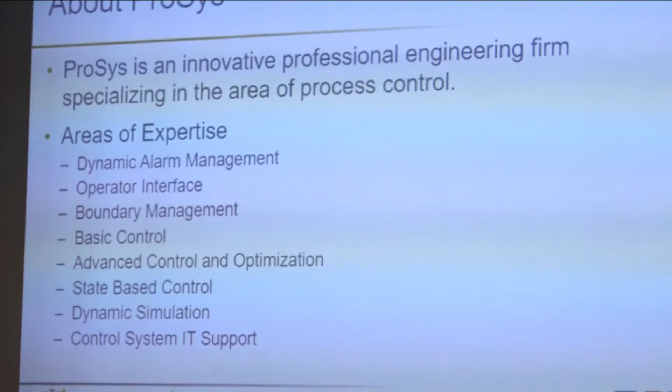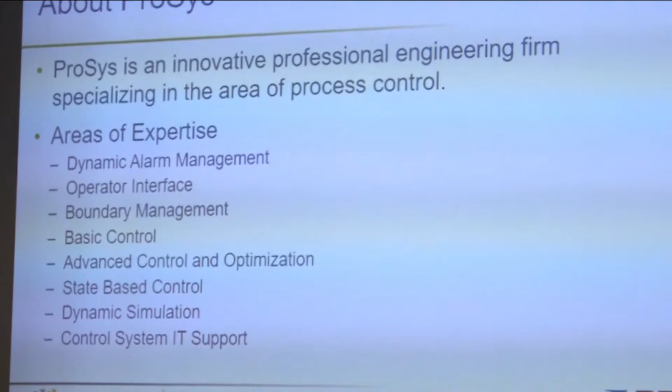Basic control, advanced control and optimization, a lot of MPC implementations we do as well. State-based control is another growing area, more popularly known as procedural automation, dynamic simulation, and control system IT support. A lot of people put these in a bucket and call that advanced apps - basically, anything that sits on top of the control system that leverages it is largely what we're doing.

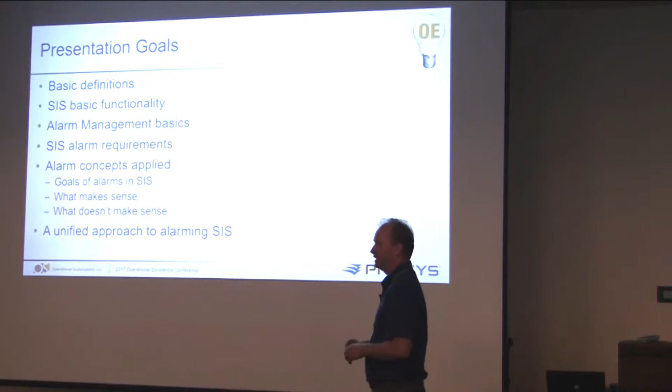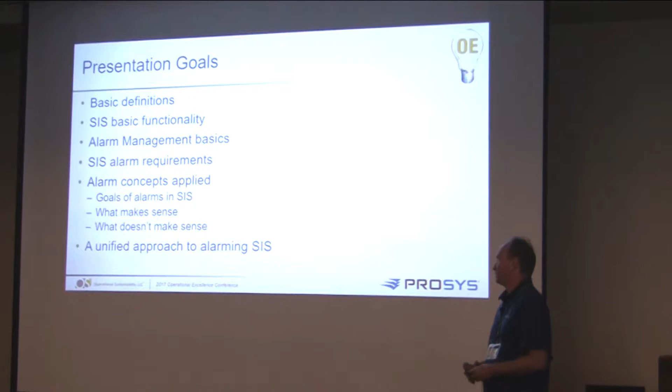So some of the presentation goals: as a good engineer, I have to define the terms I'm going to use, right, because we don't like to miscommunicate - we're all into the details about that. We'll talk a little bit about the basic functionality and why that causes alarms with the SIS, some of the alarm management basics, and then we'll take you into some real practical details, some requirements, some different things that we recommend you should do with your SIS system as it relates to alarming.

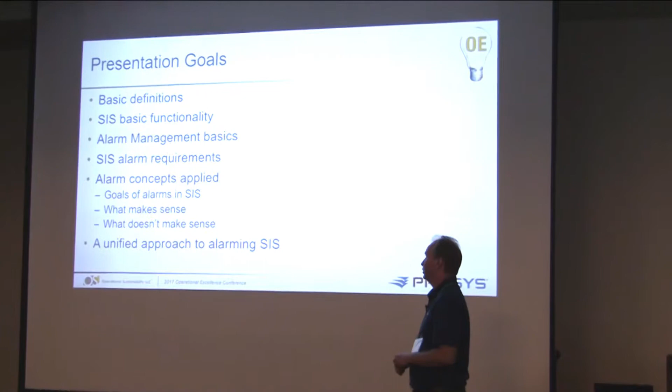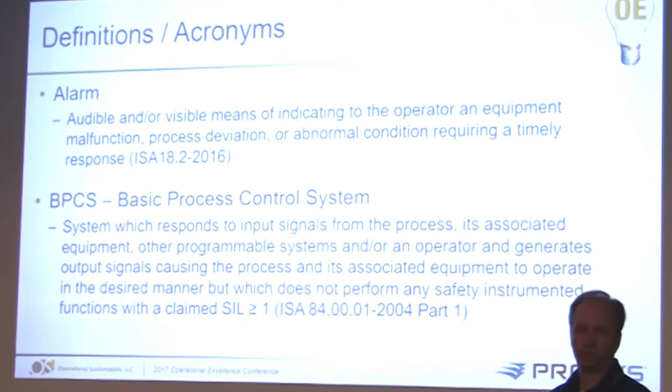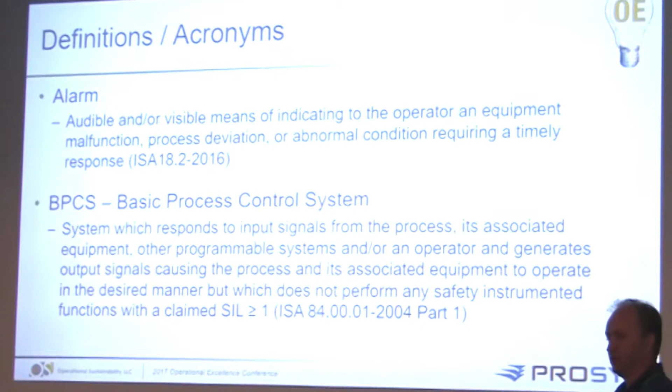So right on to the definitions. An alarm - there's a definition in ISA 18.2 about this - it's an audible or visible means of indicating an operator of equipment malfunction, process deviation, or abnormal condition, right? So it's something that indicates something bad is going to happen. We're trying to notify the operator, hey, this thing is going to happen, here's the alarm, you can react to it and potentially limit or prevent the consequence from occurring. So alarms, one thing to keep in mind, are all about consequences. No consequence, no alarm. Consequence, alarm - that's one of the important things.

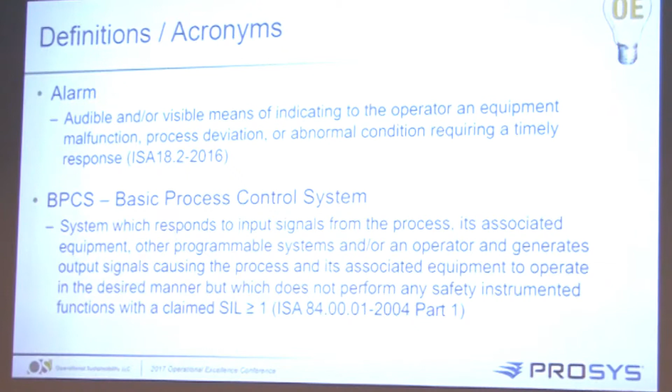Basic Process Control System, BPCS - that is our control system that's responding to the inputs. It's not part of the safety instrumented system. The instrumented system is part of the basic control of the process, right? So that's one of the elements that's there, and that's defined in ISA 84.

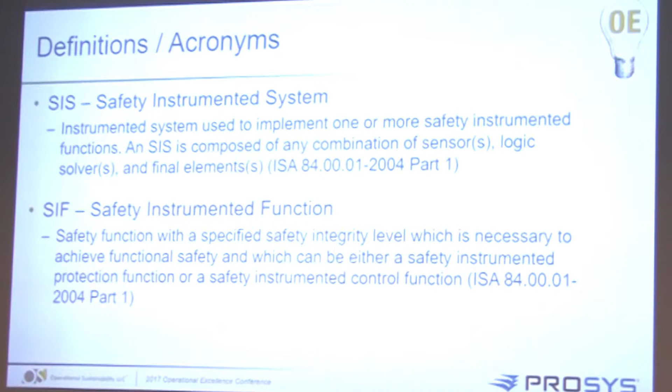Safety Instrumented System, that's very well defined in ISA 84. That is our system that's performing our SIS - it's the thing that we're implementing these recommendations in, that you guys saw earlier how to do a well design on. That's our safety instrumented system that's out there - it's our Triconex, it's our safety manager, whatever system you're using there, that is the system that's implemented. A SIF obviously is a function that we're trying to protect against, and again, those are well defined in ISA 84.

Independent protection layer is something that's been discussed, but basically the understanding is that this would protect the process from going into one of these bad areas where we'd have consequences occurring. So we're trying to define as many layers between us and this bad thing happening. And they have to be independent, which is part of the definition. I can't have one failure lead to the failure of multiple of these layers. That is defined in AIChE.

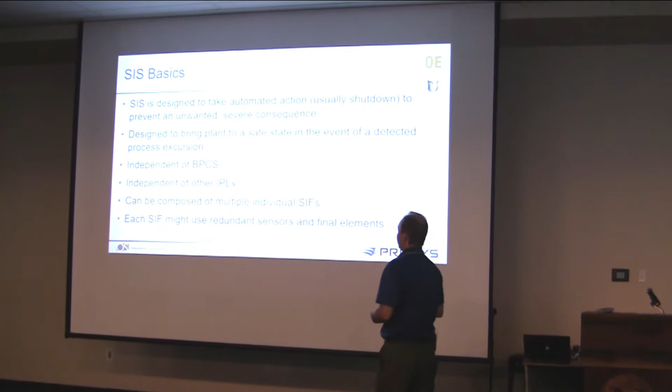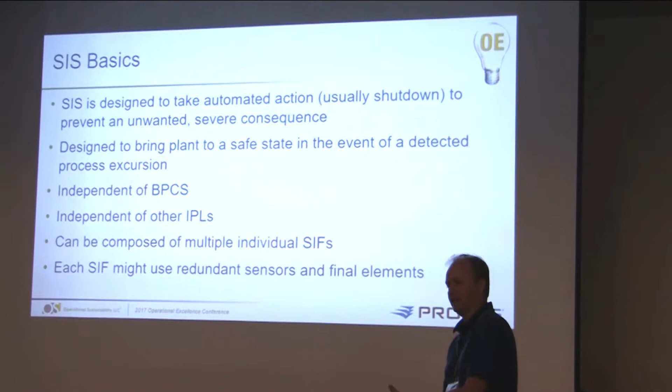SIS basics. The SIS is designed to take an automated action. We're running along, a condition occurs, the SIS detects the condition, it takes corrective action to put the process into a predefined state, a safe state that we want it in, in response to that condition.

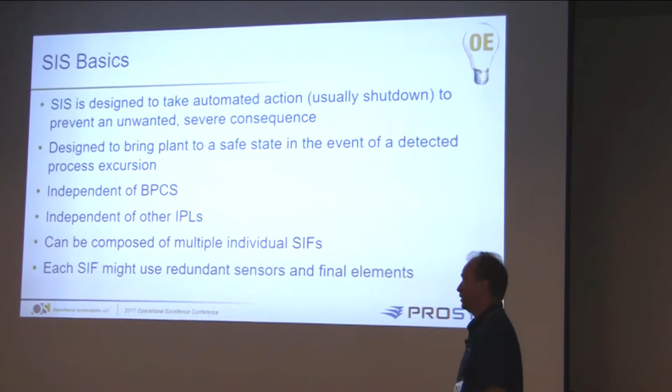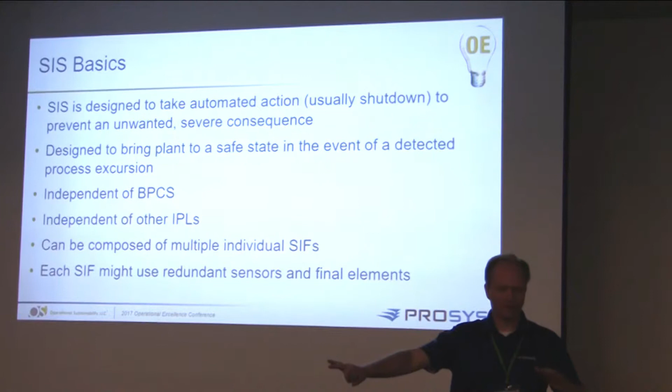To prevent what? Unwanted states. We say this area is bad, this area is good, and if I start to go that way, at some point we say, okay, we're going to go this direction with it instead of continuing in that direction. So we're trying to bring the plant to a safe state in the event of this process excursion.

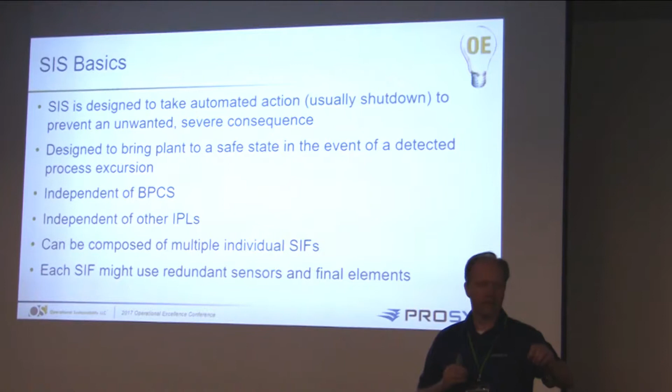So I'm running here, and for some reason I start heading in a wrong direction. And at some point we say, hey, that's enough. We need to cut it out. We need to go in a different direction.

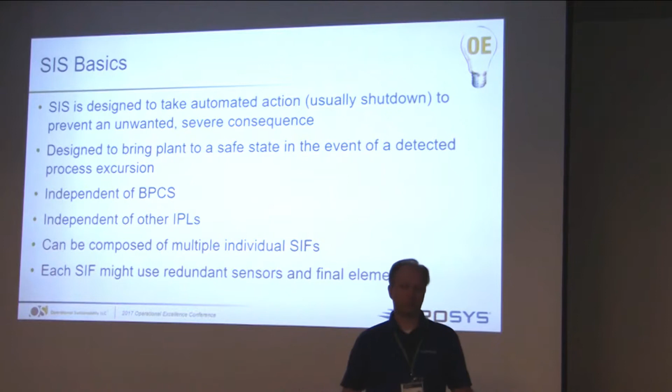It's independent of the process control system. The process control system could be an initiator of it—it could be dragging us in that direction. It's got to be independent of other IPLs, so I can't have hardware systems or anything else that's there. It's got to be all independent.

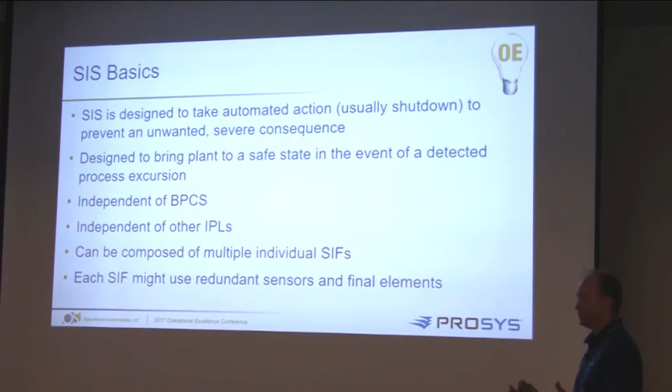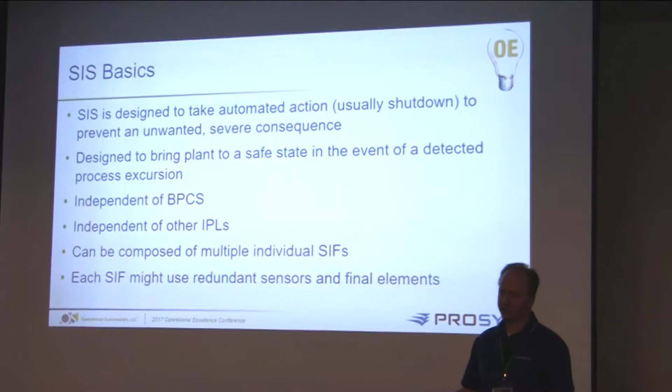It can be composed of multiple safety instrument functions, so I put a whole lot of different functions into a single SIS. And obviously each SIF can have different sensors. And so this is sort of where the challenge starts to begin now.

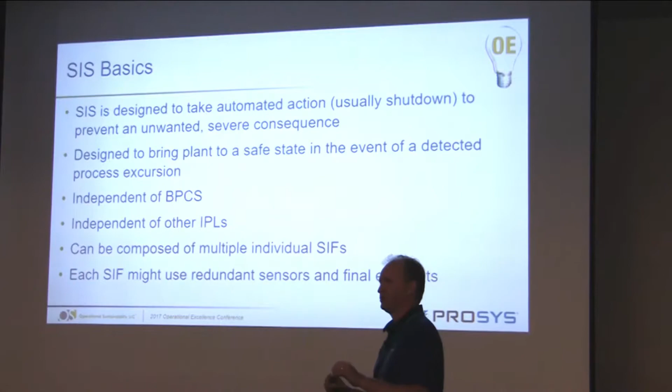Because in a control system, when we have inputs or sensors, we like to put alarms on them. And we've got outputs, we like to do different things there too—we can even alarm those, believe it or not. And so there becomes a lot of opportunity, and a lot of people get creative and say, oh, I can alarm this or I can alarm that. That might tell me some information I might want to know. And notice the verbiage I'm using there. So we're going to start going through that.

One of the things we noticed is that there were two really bad actors when we started measuring alarms back in the mid-90s, late 90s. We noticed that one particular area was growing—it was alarms coming from our SIS systems that we were annunciating in the control system. It actually started eclipsing all other areas as being the worst actor there. The two areas were bad instrumentation alarms, like foundation fieldbus, those type of things, and the other one was the SIS.

And so eventually we got to where a majority of alarm floods were actually caused by SIS systems. And we said, wait a minute, we need to take a look at this.

There's a lot of misconceptions out there in industry, and that's what you're going to see, so we're going to talk about this.

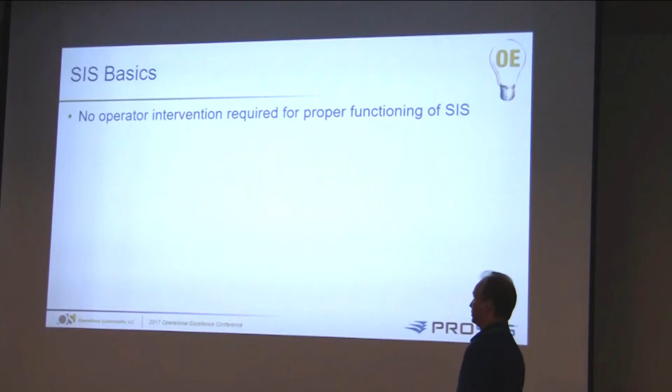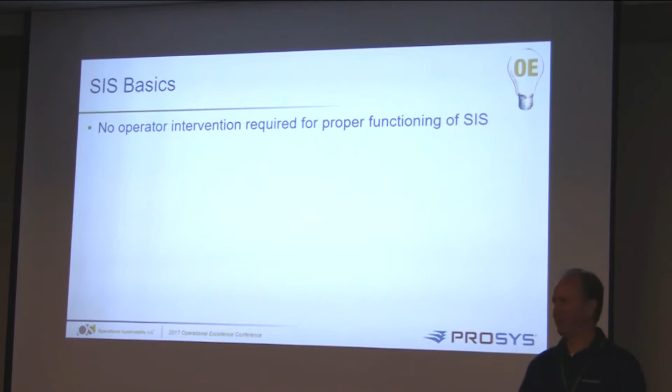SIS basics: an operator action is not required for my SIS to operate correctly. Is that correct? Yes, everybody can say yes to that one, right? If I required my operator for my SIS to function, that's not a good thing. It's not independent. There's nothing there that SIS needs from the operator in order for it to run correctly.

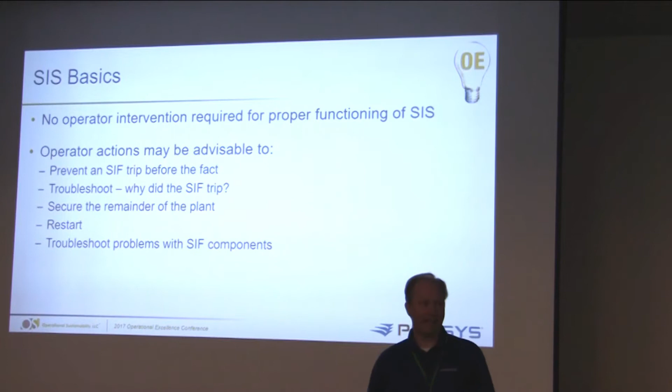And that's an important thing when we start talking about alarms, right? So operator actions, what is that alarm doing? It's asking the operator to act, right? So now you can sort of see a little bit where I'm going with this first point.

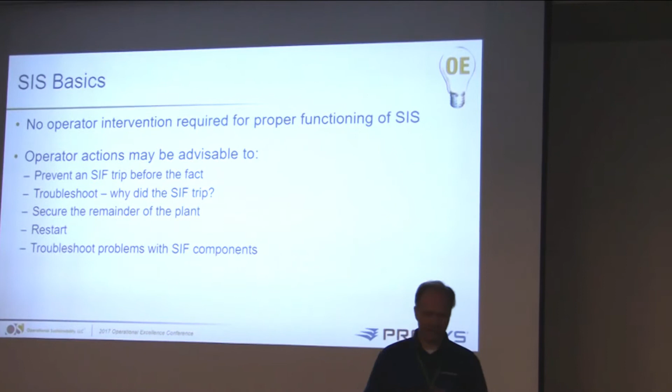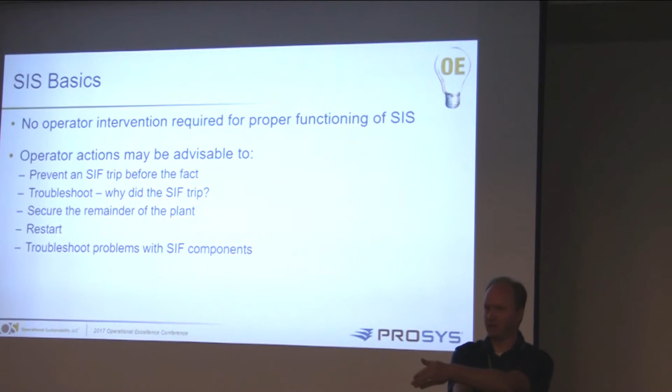So operator actions, there are some things he can do. I might be heading in this direction towards my bad area, and as I get so far down that road, I'm going to go, well, if I get to here, I'm going to this other area, and I don't necessarily want that to occur. I would like to go back to where I came from. So that would be one thing. So I can prevent this SIF trip before the fact. That's one of the things that can occur there.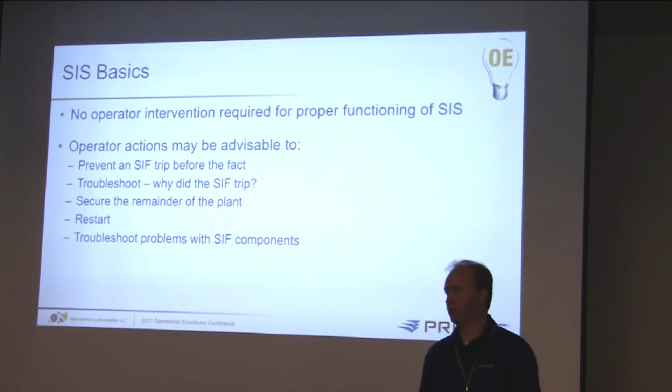Because there are consequences of that SIS trip occurring. What are some of the consequences? Loss of productivity, right? You've got to answer a little bit to the shareholders as to why we're not making as much product right now. There are issues.

And to be truthful, it's not 100% as well. That's the other thing that people get into an issue with SIS, is that people think, well, it's bulletproof. Well, I don't want to constantly be hitting that. You have a demand calculation there, right?

And if I'm currently... it's like me driving my car down the road. If I'm sitting here, I'm going to drive back to Baton Rouge this afternoon. I could say, you know what, I'm just going to put the right fender right up on that guardrail, and I'm just going to ride it all the way to Baton Rouge. Would that be a good plan? No. But if I'm sitting there tripping my SIS system all the time, that's basically the way I'm running my plant.

So you've got to be careful about how you do that. That's one of the things why we might have alarms between us and our SIS trips, because we want to prevent activations of that SIS, because then it drives my demand calculation in the wrong direction.

So troubleshoot: why did the SIF trip? Why did we end up in the situation that we're in? That is another thing. We'll talk a little bit about that.

To secure the remainder of the plant, right? If I have one unit that trips out, I might very well need to take actions in other places. I might need to limit feed coming to that unit. I might need to divert things to different areas. So those are some of the things that can happen.